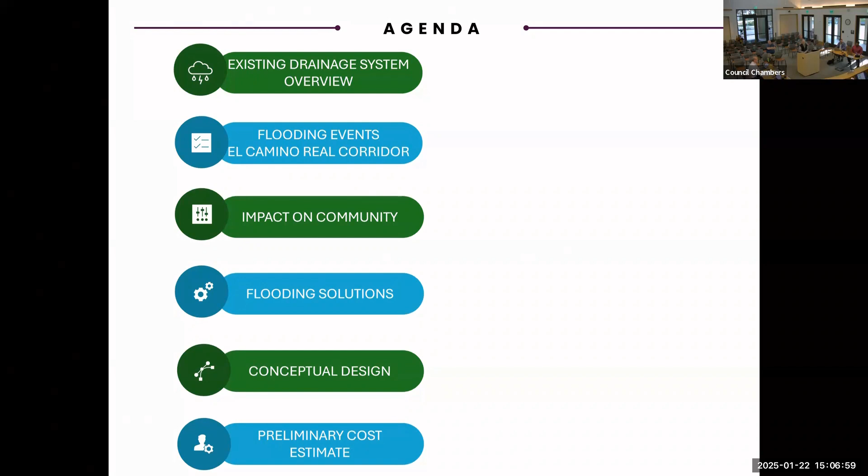We're a nice small group here, so if you do have questions, feel free to interrupt. We're basically going to go through and talk about the existing drainage system, flooding that has been recorded, impacts that we have or that we're concerned with, and actions that need to be fleshed out—and my favorite thing, which is cost. Next slide, please.

This graphic shows that the general topography of the town and drainage tends to go from the 280 side down to El Camino, crosses El Camino, and then goes off towards the east. The largest drainage system, as Robert mentioned, is the Atherton Channel, that's the blue line you see going from left to right. Our concern for the time being is the highlighted yellow line, which is El Camino.

Part of the problem is there's not a whole lot of storm drain infrastructure from Atherton Channel. I'm going to pretend El Camino runs north and south, so I can talk about left and right, up and down. The general topography is from 280 down to El Camino, and also from Valparaiso north. You've got this table that's kind of tilted at an angle, and that's where the water tends to want to go.

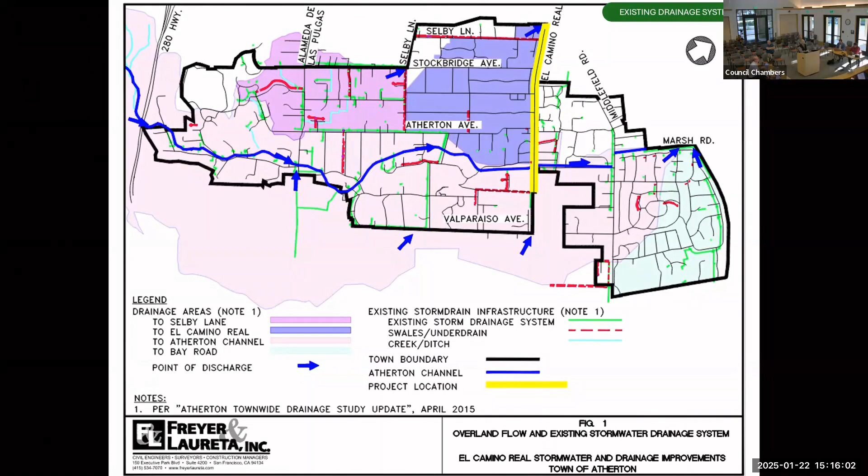Our focus was on El Camino. I know all the rest of this stuff flows to us, it flows to El Camino. When it gets to El Camino, there's a hump across the street. That's part of the reason flooding occurs along El Camino - it's caused by very flat topography and very poor infiltration in our soils. Clay, adobe clay soils suck, the infiltration goes, and so we get ponding that just stays there.

As Robert mentioned, we looked at a bunch of historical records - what Caltrans said they built in 1941 and the 90s - and then went out in the field to verify. What you're seeing here is a summary of both what we know is out in the field plus county records plus Caltrans records. For example, the purple highlighted area in the middle - Caltrans said they built that section, but they didn't. We went out there and verified they didn't. We looked at their as-built plans again, and there was a little note that said, even though it says as-built on the plan set, we're not going to build this because we ran into a bunch of utilities and gave up. So you look at this and realize there's not a whole lot of infrastructure to handle the amount of ponding we get at the end of this.

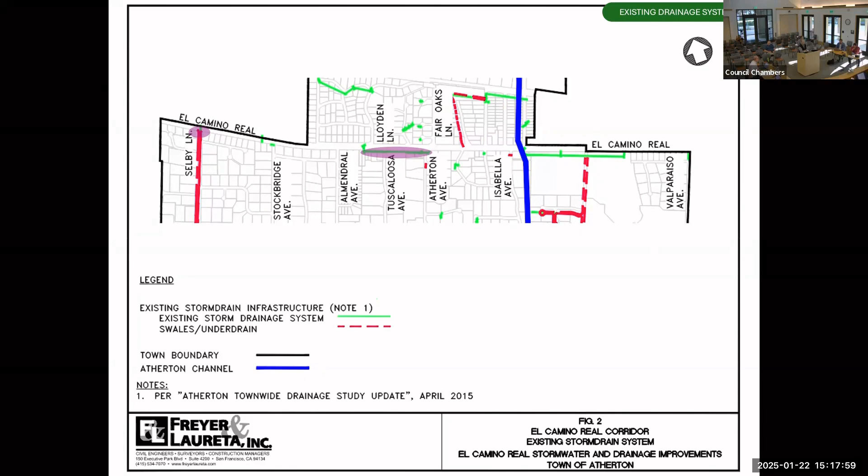If you keep this mental picture, let's go to the next slide.

There's already been a storm drainage study, the townwide storm drainage study, which identified places of concern with little red teardrops. We went out there in December last month when it was pouring rain just to verify what we could see, and the purple dots lined up with the recorded areas. Sure enough, it's flooded - you can see it in the photos, there's ponding all over the place.

The topography out there, like I mentioned, is that the Atherton Channel is a low spot because that's where everything drains. Then as you get towards Isabella and Atherton Avenue, it slopes the other way, so there's a mild grade that goes towards Redwood City. We looked at this, and there's really nothing that would push the water over into some of these systems.

There are some culverts that cross El Camino, and most of them are way undersized for a storm drain system. They're almost cobbled together - for example, there's not a good head wall, not a good discharge point. You look at some of these photos and think, wow, that thing crosses El Camino, amazing - just a little pipe going through. And when you get smaller pipes, they tend to clog all the time, so it's a maintenance hassle - you could make it work, but you'd be flushing this thing constantly, which kind of defeats the purpose.

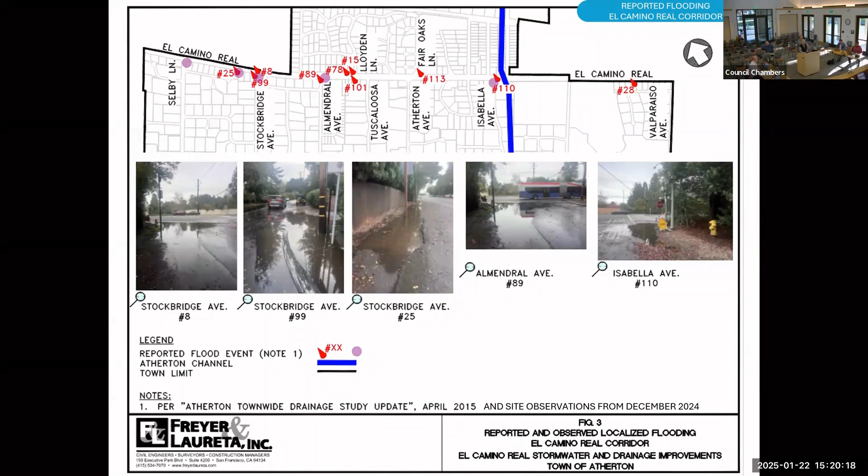Go to the next slide.

So we're looking at this and some of the issues that were predominantly part of the analysis - safety was number one. This ponding, this flooding is a mess for pedestrians, for bikers, for drivers.

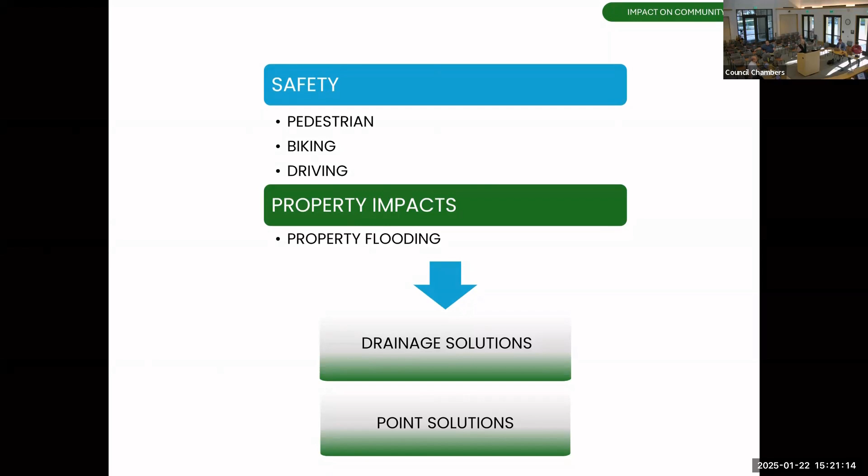And looking for solutions, we weren't just looking for one solution that covered everything. We're looking for how much of the system can we address, knowing there's going to be some outlier points we'll pick up in other ways. So that was the guidance: try and get as much of a chunk as we possibly can, and for outlying areas, it's not really worth trying to get infrastructure all the way out, but we'll see what we can do.

So with all that having been said, I'll spend a little bit of time on this slide. One of the challenges - if you have enough money and time, you could probably build anything you want, but constructability is a big issue. Especially with existing infrastructure, you're dealing with gas lines, sewer lines, water lines, that sort of stuff. So when we're walking through the logic of what would be a good alternative, we're considering constructability - can't build it, what's the point?

Next one is cost - trying to be sensitive to how much all this stuff costs to put in. We're looking at environmental impacts, and because of the regulations we have with the water board, there's also a trash capture and water quality component to the system. For this case, we're saying there's going to be an improvement eventually, so we wanted to take that into account by not building something that's going to get ripped out in 10 or 15 years.

So the obvious thing is to say, well, let's just build this. You don't even have to do dewatering, you could just do a brand new storm drain system. Wouldn't that be great?

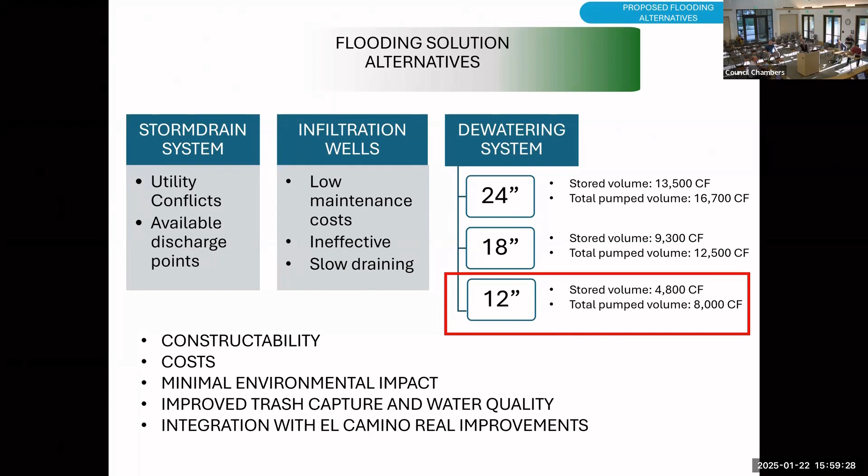Should we keep your slides? Okay, sorry. Excellent. No, that's okay.

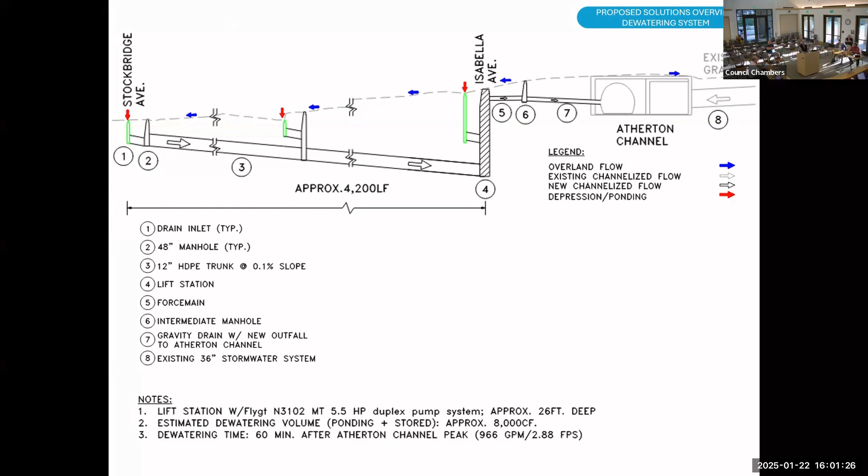Another thing we looked at, as I mentioned earlier, was how this would impact the different alternatives for improvements along El Camino. The last thing you want is to put this infrastructure in and not be able to get to it. So we made sure the alignment was in a place where you can dig things up if you have to. There will be access to this line through the catch basins and manholes associated with it.

From a maintenance point of view, this is pretty easy to maintain, like any storm drain system, but it's a dewatering system. We wanted to show this because it would convince Caltrans too—that you're deep and not in conflict with any of the improvements we're going to put on the surface.

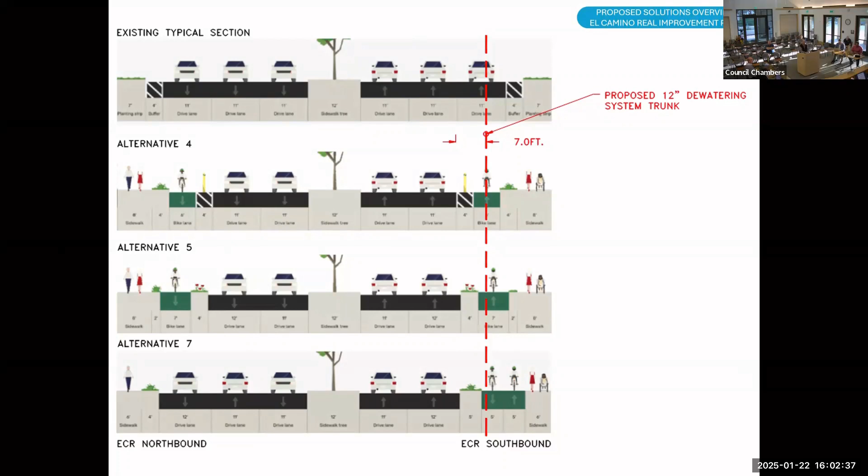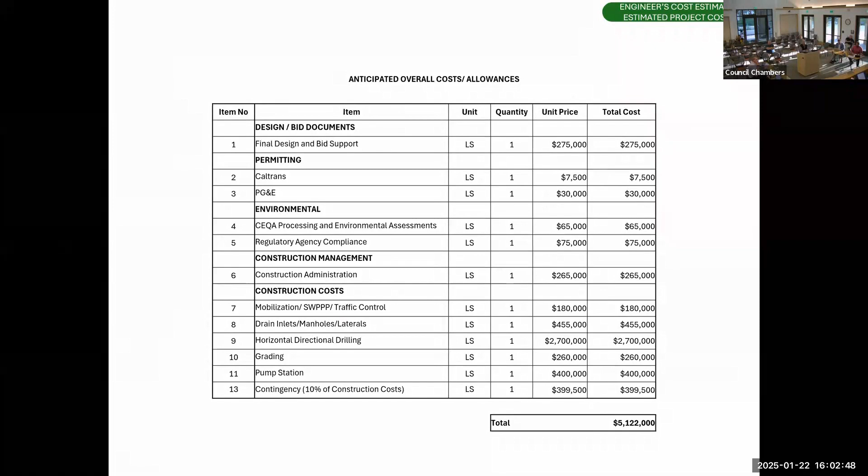So these numbers may be hard to read, but we wanted to get an idea of the order of magnitude of what we're talking about. So we're looking at soft costs and hard costs. The construction costs are towards the bottom.

We asked a couple of directional drill folks what it would cost and how they would set it up. They looked at the plan set in pretty good detail and said they would do a launch pit where the manholes go, drill in one direction until they got to the next manhole, then turn around and drill the other direction until they got to the other manhole. So we're being very efficient—we only have to set up three or four times. That's how they got a cost of 2.7 million.

Horizontal drilling means instead of a full trench—we're not doing that—it'll just happen under the road while people are driving on it. We'll close off that lane for safety, since you've got a piece of equipment in that area. You'll have a separator for traffic and a piece of equipment that drops down to whatever level it needs to, and the horizontal drill does its thing all underground. So aside from the area you cordon off to do the drilling, everything else stays the same.

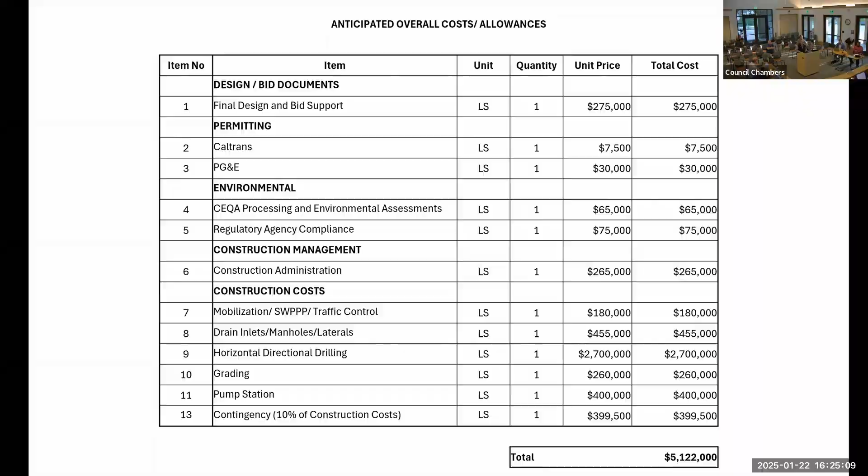Love it, thank you. Thank you, Eric. Thank you very much, glad folks. Yeah, very appreciate it, glad you guys are doing it. Thank you, Robert. Thank you. It's the type of thing that you should be looking at.

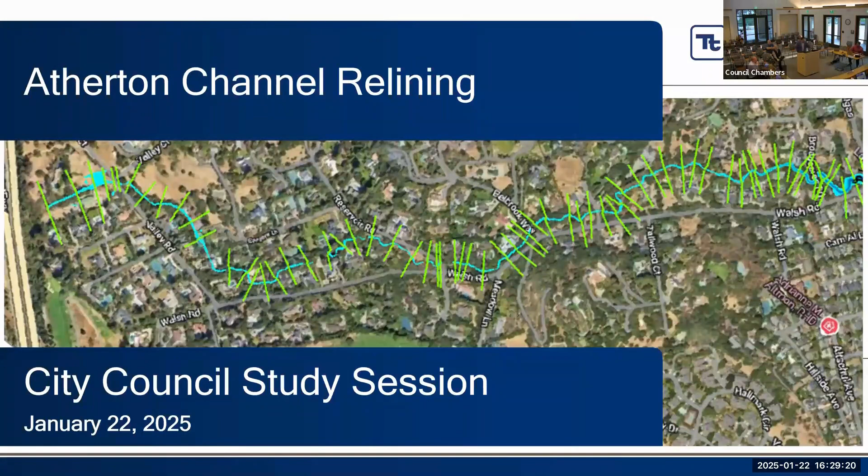Thank you very much. Thank you very much, everyone.

So yeah, we're here to present the project itself, because you can see the agenda. We can go over the work that's completed, the items that we have, discussion points from those items. The really big thing that we did do is the channel inspections and the overview. So we went out there, did a preliminary of it, took some notes. We got some LiDAR, then did some preliminary modeling. Then we also went back out again, identified and mapped everything up, linked it up a bit. Came up with some conceptual design solutions, discussed some considerations, and forward now. So that's what we have to present today.

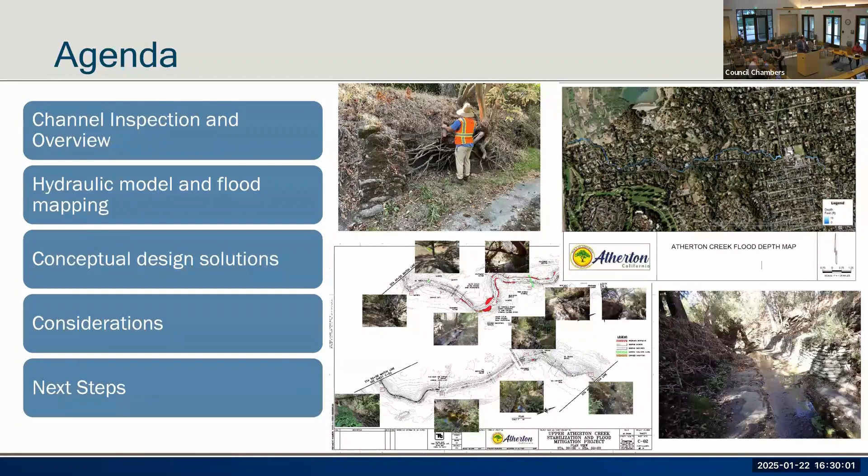So we have some slides here, so you can see the typical channels. Some areas actually have what we call sackcrete, which is basically a burlap sack concrete. It's a little grid structure that works until it doesn't. So there's a lot of that out there. It looks like there was some shotcrete repair.

Right there you can see Walsh Road on the left side of the pictures. So there's actually an embankment there that kind of failed. I think the property owner mentioned he replaced that fence a bit. There is some sandstone there that's kind of protecting it from further erosion.

So this is a very unique wash in which there are existing old improvements that have been incorporated. There's been other improvements such as concreting of the invert. And then there's a lot of vegetation, trees, wildlife that helps resist some of the scour and keep the creek as a natural kind of creek. Then you also have some geologic formations, some which are more susceptible to scour, others which resist it. So these are just some pictures through this, starting from the bottom, moving up.

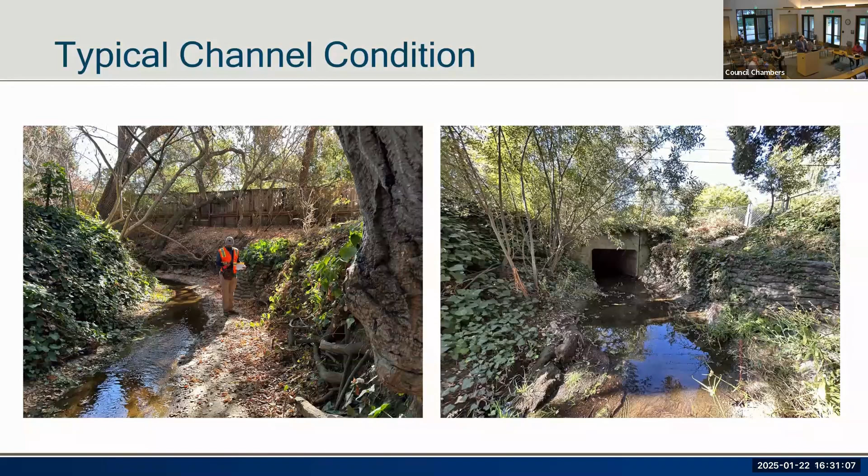So if we go to the next slide, you can see some other items. Starting at the bottom, is that at the channel in Alameda de las Pulgas? Yes, just the upstream side of that, just to the north. Scour - what a scour is, well, you'll see it.

So on the left picture here, you have a failure. This is where you probably had a tree. Sackcrete is not reinforced, so it's kind of like stacking - you know, when you were a kid and you made mud rocks and you stacked them. They dry, they kind of stick together. And then you push them over and they break apart, right? So that's kind of like sackcrete. It's good when the flows are low and there's not a lot of loading on it, but tree roots start to grow and start to crack it.

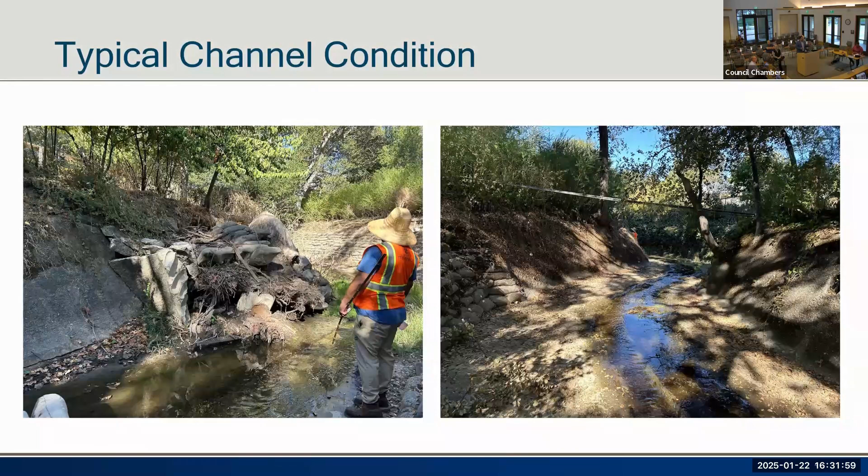You get some failure, that's what you have on the left. So scour would be on this slide. You can see on the left side, and on the right how the bank - those are actually roots that are exposed, so that's where the soil's been removed. It's gone downstream. Also you can see here this is part of the concrete slab, but you can see that little green part where the water is on the right - that's probably about a foot or two deep. So that's what scour is, where the bedding gets removed, it kind of goes below grade. So you have a loss of channel width, loss of channel, a removal of channel slope and bank.

All these different materials, have we done that? Is that city, or do the private residents actually go out and decide to do stuff for themselves? Or through the eras, one year we did sacks, one year we did cement - how did it work? I'm going to say this channel dates back before the 50s and it has been incrementally improved, some by property owners and some by the town. But anytime a property owner wants to make improvements in, around, or near the channel, they have to go through the town to get a permit. So we do inspect, we keep track of it, but it's a mix of what we've done and what private residents have done.

As we go through the wash, you see some developments, some people have developed newer homes maybe 10 years back. That part, they went through the permit process - they're building close to the wash, they may put some walls or something in there. A lot of this, as was said, is very old, 50s, before the town, I think.

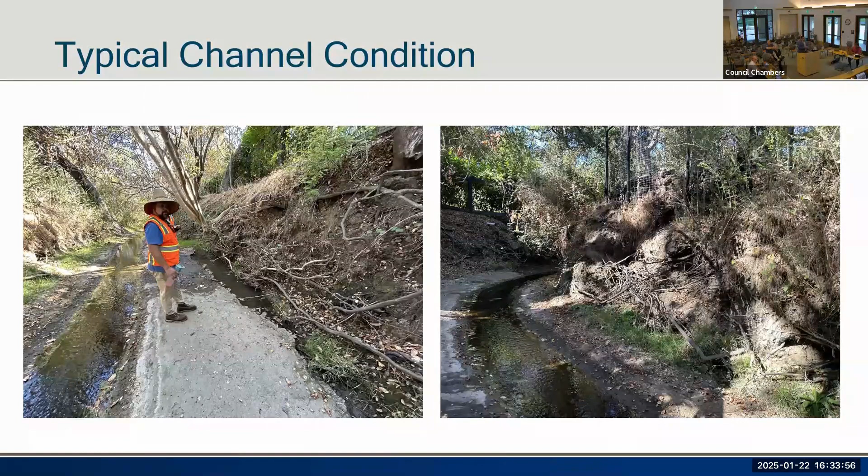So yeah, these are just a couple of the typical channel conditions. On the right there you can see a lot of poison oak, so that's the fun part. But as I mentioned, you have a lot of trees, a lot of foliage that's kind of washed out the roots. So it's kind of unique in that we have these trees that are still surviving.

So the improvements have got to take that into consideration on how we repair these items. That kind of goes into our next solutions. A couple last ones - this is as we get upstream. There is a section of channel that's actually existing mortar and rock, or mortar and sack, broken up concrete - just urban ways of making drainage ditches. You just use the material that's there and throw some concrete in there, and it works for what you need, right? Because your house is offset from it.

And then there's some improvements that are done by the large irrigation water line that goes underneath. So it seems like there were some check dams that were done, some improvements - you can see those are actually more infrastructure that's out there with riprap up and downstream. I think that's kind of used to help prevent scour.

There's a natural section that starts just upstream of the rock channel where it goes natural. That portion is more susceptible to scour and what we call head cut, which is where you have a section that's natural - you have concrete here so it's not going to scour, but then you have a natural section that's maybe a little steeper, so it'll want to scour and flatten out, and then you have a big drop. So I think those were kind of installed - that's my opinion - to help protect the water line, to prevent any type of head cut that would eventually cause failure of the transmission water line. There's some images where you see piping.

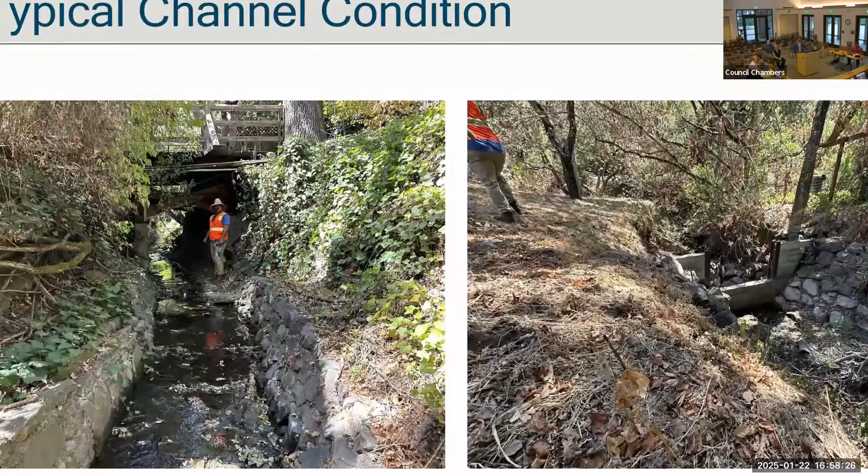If you look above my head on the left side, it looks like some type of telecom wire—that looks like a bridge, doesn't it? No, right below the bridge, in front, there's a wire there. It might hang down, or it could be electrical, or a water pipe. So you have electrical, water, and other things. Some people's property bridges the channel, so that's a private bridge right there.

What did we have to do to mitigate for the frogs in the past—do we have little ponds and retention areas already? Is that on the land shown in that picture he showed on the other side? That same slide where the check dam was, to hold water back and slow it down—did you guys do that right there? Yeah, that thing was the picture on the right.

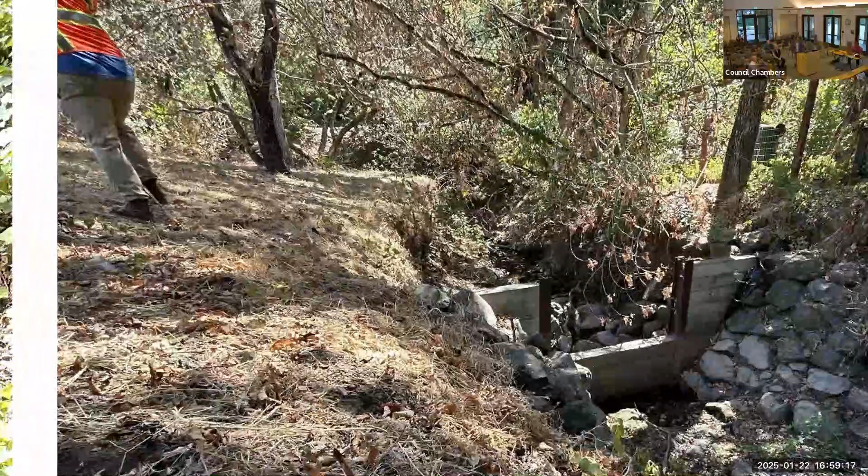So that structure there, those lower pieces of wood, that holds water back, creates a little pond for the frogs. The water goes over the side of the channel, and goes down the middle. That slows it down, but creates a blockage, a little dam. You can see how there's that little U, so it creates a small ponded area. Then the water kind of waterfalls over when it's smaller, and if it's larger, it gets a little deeper. It creates little ponds and little areas.

What happens in a big storm? Right now, the water would come through and start to pond up, and what we call weir, it'd start to go through that U part, and then if it got large enough, it'd start to flank around the sides of it.

Will we most likely have to do something like this again? We will find out, possibly. Yeah, so like I said, that's part of the environmental process.

Those are a little bit more of a structural solution, and it's a little bit more expensive. There's a ladder and piping that looks like a pump in site 7.

Yeah, that's where the guy has a sump pump down there. So it's his ladder, I actually used it to get down to the channels. Thank you, it makes it easier down there.

But yeah, as you can see, there's a lot of water. This is in the concrete section, so there's a lot of water going down the concrete. The channel itself has a lot of flow from dry flow. So he's down at the bottom in the concrete section, and he created like a little sump that pumps the water up. I think it looks like he waters his grass and plants and stuff.

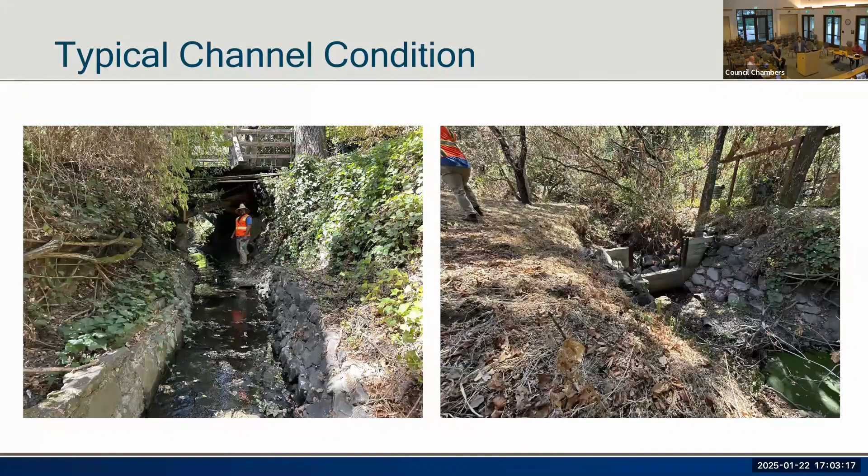So when you speak to that, I know it's on your next steps slides, talking about confirming the existing channel easement. Can you talk a little about when you get there, if any portion of the current channel is outside of our current easement? Actually, if you go to the slide, that portion's probably outside.

So the one picture on the left, you see all those roots there and see how that water looks like it's on the left. The actual existing concrete channel is actually on the right, and it's covered with other sediment from the other slope sliding. So that whole wet area is basically a scoured out portion of bank.

Yeah, so it's a balance, and it gets back to what you said, the ecological side. There's a balance of letting it just be natural, but then you've got to have larger offsets from the channel.

And then you also have development, which increases scour, so you have to balance it. So the geomorphology side of things, geology of hydraulics and riverine systems and how waters affect stuff.

I'm just working through the next steps of George's question about the water has moved out of our easement, so the creek is not in the easement anymore. Does that mean we have to confirm or change the easement? We have to confirm it, but based upon where the concrete is, that's probably an extra 10 feet over. It's only a 25-foot easement, and 10 feet of it was concrete.

Well, you have 5 or 10 feet left of that. I'm 10 feet over already and still have 10 feet of bottom plus bank, so you're going to be inside - your logic would say. I get that part, but I'm more, what happens now? Do we then fill that side to move the water back, or are we adjusting the easement?

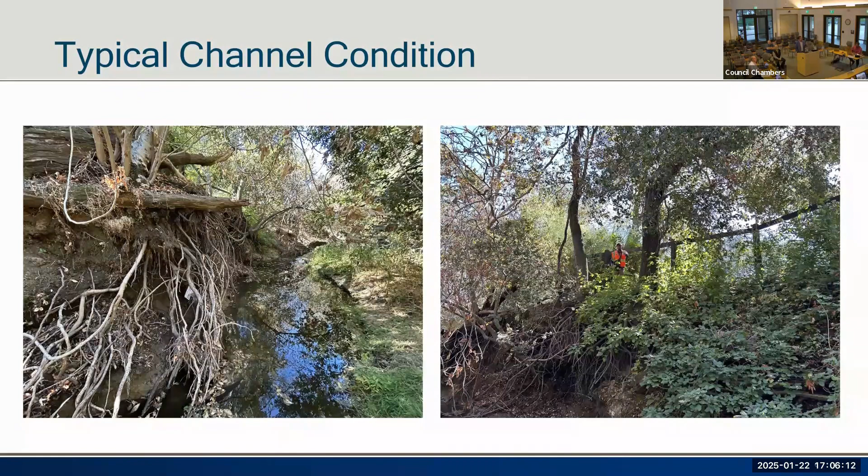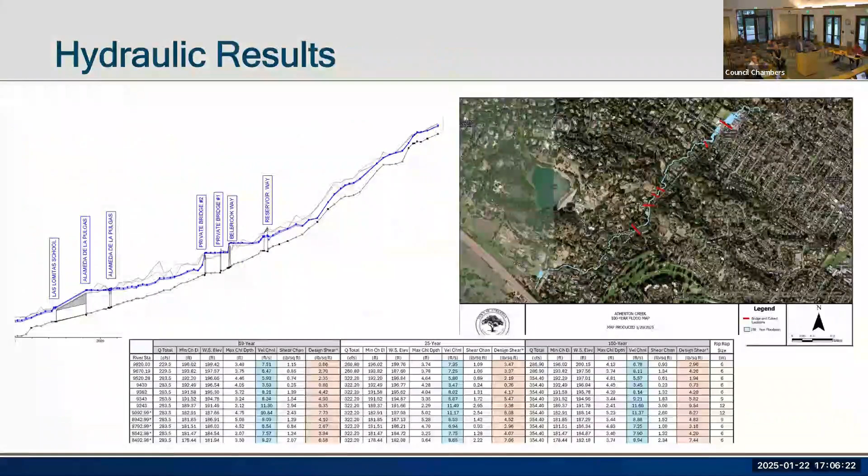So I think the bottom is kind of like the constriction point for these improvements. Let's go back to where we stepped out, where I last left off. Keep going, right here. So now I'll go through it.

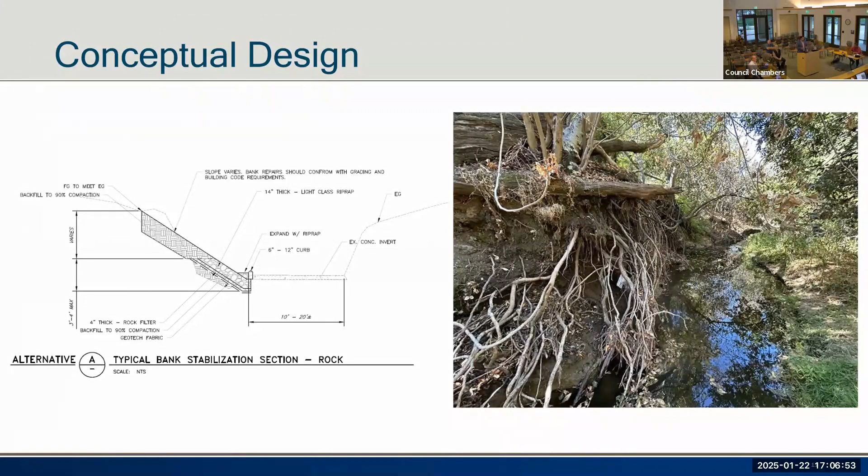If you go to the next slide, we kind of give an example for each one. So this is the picture we just talked about. In this section, if you were to build back the slope a bit, you can add some riprap and then slope it back, maybe balance that easement and widen it out to let it be natural. But this is something where we might do riprap embankment here because there's this big gap we have to address - that's how we'd apply that section.

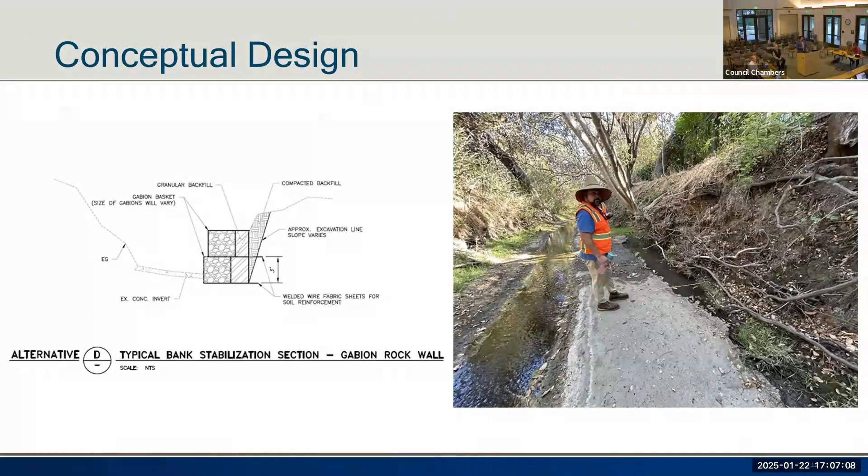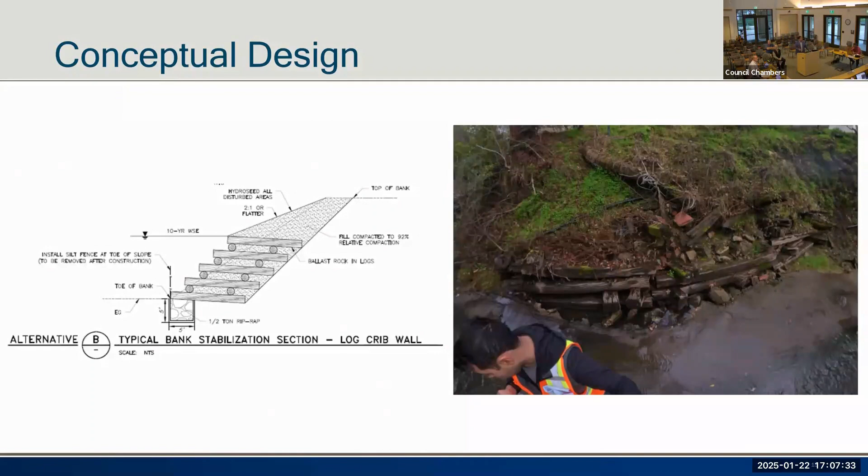People are going to be assisting us with giving us temporary usage of their property items. And there's some areas that may be more critical, something near a structure or something that we want to repair more critical, so we'll be discussing that. Some may be more open and can wait.

So there's going to be a lot of items that play into all that with the construction cost, the permitting, and then any special environmental constraints, like this is a no-touch zone, this is a highly sensitive area. That can end up being a little bit more costly.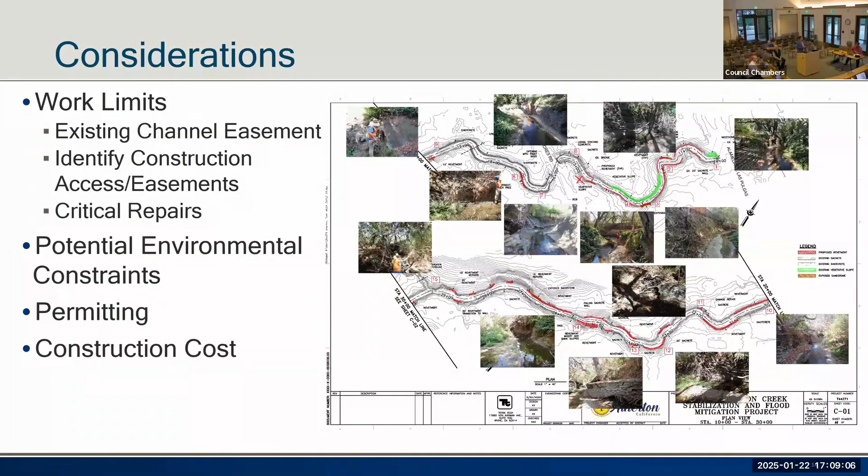Next slide is just our next steps, which is going back and overlaying our easement. So we have a topo, so we can see where those areas are, where the easement is, and say yeah, this is where it's scoured out more. Then we'll be performing some supplemental topo to get more information to fine tune our stuff, and then also go back and tune our list of improvements.

Coordinate with the resource agencies, which is going to be some of the most important items of what's going to be allowed, to get that balance perspective. And then from there, just proceed with the 30% design, cost estimates, and continued coordination with you guys, keeping you apprised of the solutions, and get some consent.

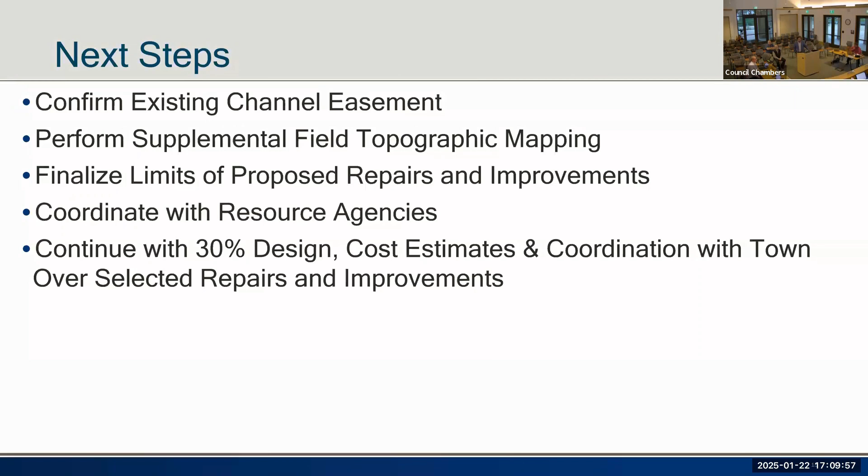Does anyone have any other questions? I have maybe a question.

For these people who have the creeks on their property, are there any guidelines for landscaping that they're allowed to do around the easement? I'm not a gardener, but I'm trying to be, and I know some plants are marked as helping erosion control, and some help make your soil more permeable, which I assume would also make it more erosion likely.

So I'm wondering, are there any restrictions or guidelines for them to plant appropriate plants to maintain the channel? There's probably more restrictions than guidelines. If they're going to do any work within the channel, they do have to get a permit, that includes the town. For landscaping, if it's minor stuff, sometimes they'll just go in and do it without us knowing, and we find it when we're doing inspections. In terms of guidelines, I don't think we have any, but it's probably a good suggestion.

Especially once we complete this work, it seems like we should be creating some kind of a program. Good suggestion.

So the current contract we have, do you guys do the work as well? No, they just do the design work. So out of all this, we're getting a design. And how long will it take to get the design?

I'm not apprised of our current schedule, but I think they're ready to proceed at a quick pace. The holdbacks are really going to be what the resource agencies and the environmental requirements are. Do we need to do a frog delineation, or those kinds of things where we have to bring others in to do extra mapping, and that kind of stuff.

He's talking about the 44 and attachment photo. I have 45 on there - one of them shows a set of stairs going down. Can you open the photo attachment, Anthony?

Their fishing deck, I guess - a set of stairs going down to a fishing deck.

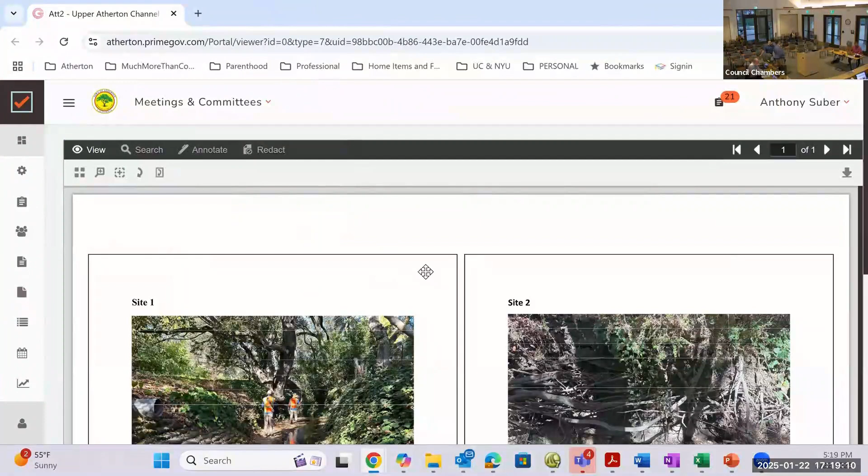Oh yes, that's at the very, very upstream part. We're not proposing anything in that section right now, but I'm just saying it looks like that's in the channel. If people call it a channel, that looks like a building in the channel with stairs giving access - it might be a deck with stairs that go down into the channel. That's the last page, right? Yeah, that's what it looks like.

And can people do that? Page 52 of the packet.

It's astounding how different it looks at different places. I can't complain because my dad put a deck over his back slope, at the top of the hill.

So they wanted to show you all those photos is to show you that along the length of the channel, it was constructed and is improved in different ways - you have some concrete sections, some sack sections, some rock sections, some natural sections, and to illustrate a lot of that.

So yes, there are people that have bridges in the channel. There's an easement for the entire channel. And can people build into the easement? I don't think they're supposed to build without a permit. Since I've been here, we've limited the number of permits that we issue, and it's really going to be restricted to - do they need a utility crossing or something like that? But we typically don't permit structures to be built in there.

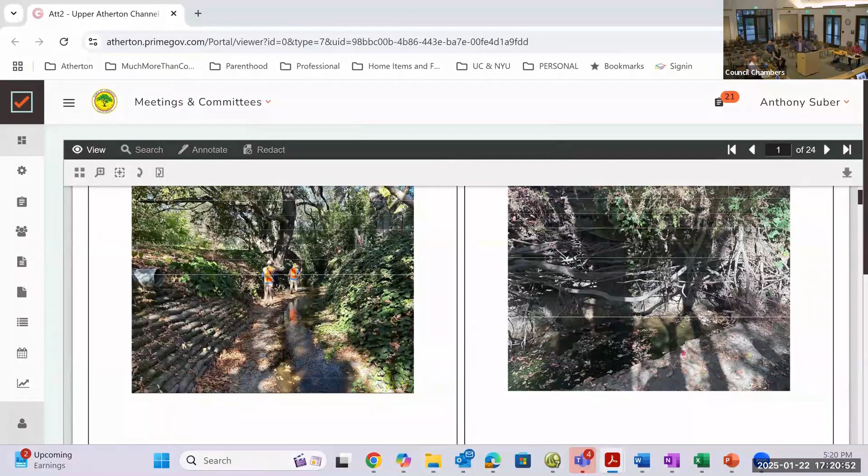That's exactly why I'm asking the question. So one of the items we can talk about at a future date as this project moves forward is, are we going to go and enforce and require people to remove things from the channel? That's a conversation we're happy to have.

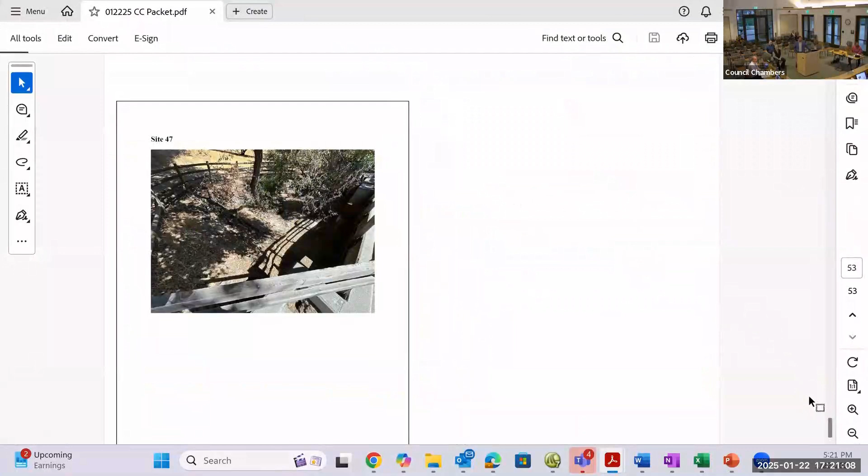In the case of that image, this site right here - this is 47, because this is actually a roadway crossing. He's talking about the stairway, 45. We don't know right now where the easement line is - that's part of what Tetra Tech is doing, is figuring out where the easement is, and then we'll find out this location.

It's on the presentation - but while you're still here, can you go to the slide before this, 45, or 44, building.

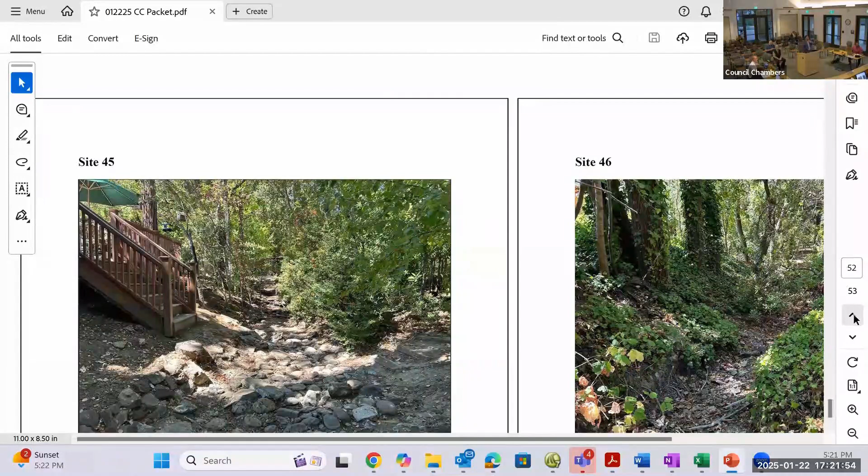Yeah, so the odds are a structure like that is actually outside of the easement - the bridge crosses, and we allow that. I mean, that might be a driveway, it might be something else, so that is something we can permit. Usually when folks come in and ask, well, how close can I build, our first answer is stay out of the easement and you should be at least 5 feet or so beyond the top of the bank.

That's at least our response right now. This is an older structure. The thing I don't know is, again, where that easement line is, and that's something Eric will be plotting in short order so we'll be able to tell where some of these improvements might be in relation to the easement. In this area too, the creek's very broad and shallow.

I don't think there's actually any. The improvements end after the one on the left, picture 40. That's kind of like a rock and grouted rock. So rather, on 44, basically all you have is a rock bottom and more natural sides.

Toward the top, where Valley turns, that's the very top - right when it turns on, that first house. Yeah, that's the house, that's the 44. Basically at the end of 44, if you look to the very back of it, that's where this picture was taken. So it's the next house over from that.

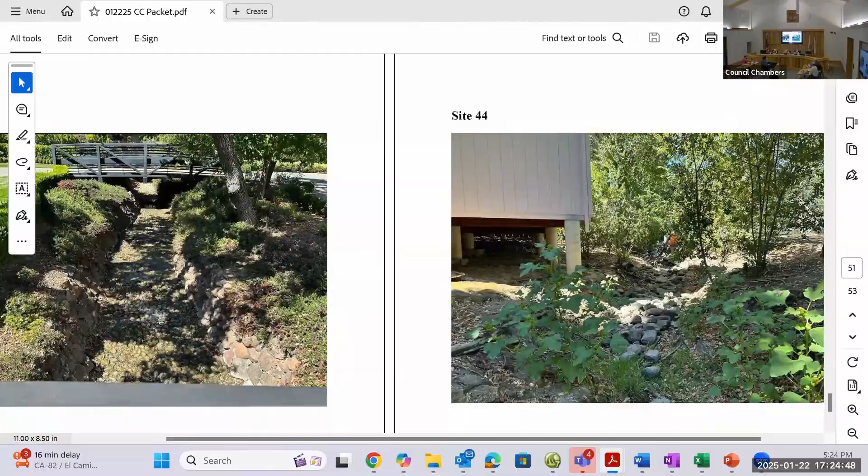I don't think we would have necessarily recharge opportunities, but there may be opportunities to soften things and lay things back. But I think our first step in this conversation is figuring out where our property rights are, and being aware that we will likely have to put everything back within those property rights. We can look at where we may have opportunities where things have eroded sufficiently away that it's like, well, that's part of the creek now.

Well, that's what I'm wondering - instead, be like, your choice, do you want to leave it? We'd also have to engage with Mona on those conversations as well. So if a property owner owns part of the creek and wants to retain that ownership, don't they have some responsibility for managing water flow on their property? There are some general laws about this - basically, you can't block water.

You have to convey it through your property. So if it's coming from upstream, you have to convey it and allow it to go down. But some of these are nuanced legal questions we're going to have to engage with Mona on as we get closer to that. In answer to your question, Madam Vice Mayor, if the property owner owns both sides of the channel and it's meandering through their backyard, it's an easier conversation about moving the easement to the channel rather than moving the channel to the easement. But if it's two different property owners and we're talking about shifting back and forth, that's a different conversation.